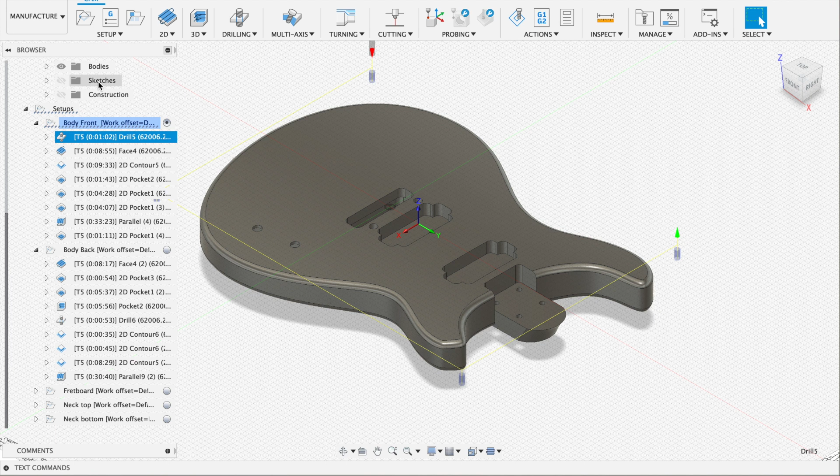Starting out with the drill strategy here. It drills 4 holes for the dowels, and I've created the points in the sketch here. So I've drawn a square and I've selected 4 points which are equally distant to each other. And that's just a simple drill strategy.

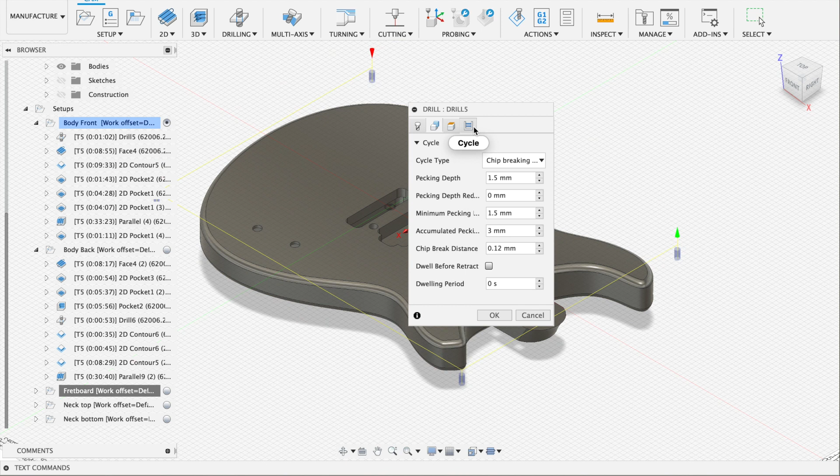4 faces. It has a 6mm flat bit. It has a plunge rate of 300. That's fast enough. And it goes down 12mm. My dowel holes, or my dowels, are 24. And it's on a chip breaking strategy. So it's a partial retract. It goes down a few millimeters, then goes up again, and then goes down a few more.

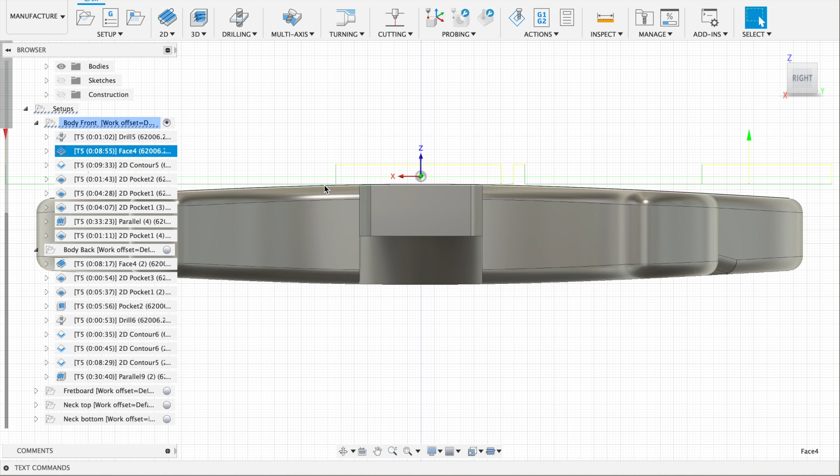Then we have the face strategy, and the face strategy just takes off a few millimeters of the stock material. If you look from the right side, it just takes off a few millimeters over here, and it stops just above the actual shape that I want. This is the process. It runs at 3000 millimeters per minute.

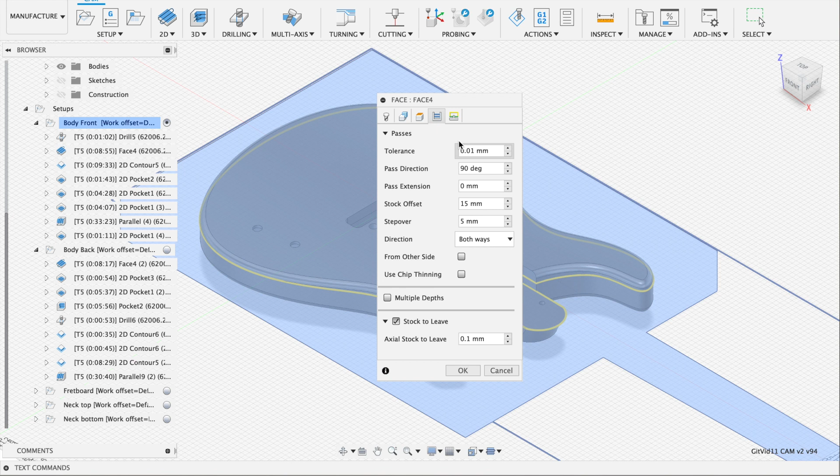I've selected this chain over here just to get the shape correct. Nothing special. There's a stock to leave on 0.1 millimeters. That's just for the later job, the parallel job that creates the final shape. And nothing fancy here as well.

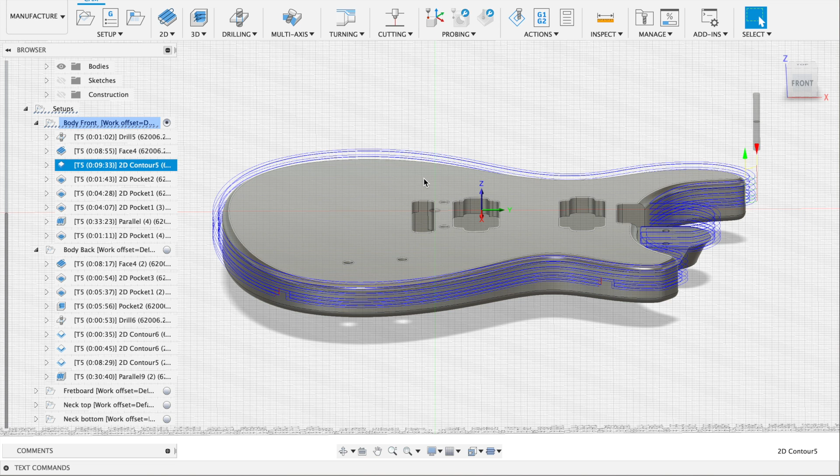So then we have the contour strategy, and this basically shapes the whole body from the side. I take off an extra layer, so then I can avoid those dreaded red lines while doing some other strategies. But also I'm creating these tabs over here, the holding tabs, just to secure the body in the stock material. I'll show you the strategy.

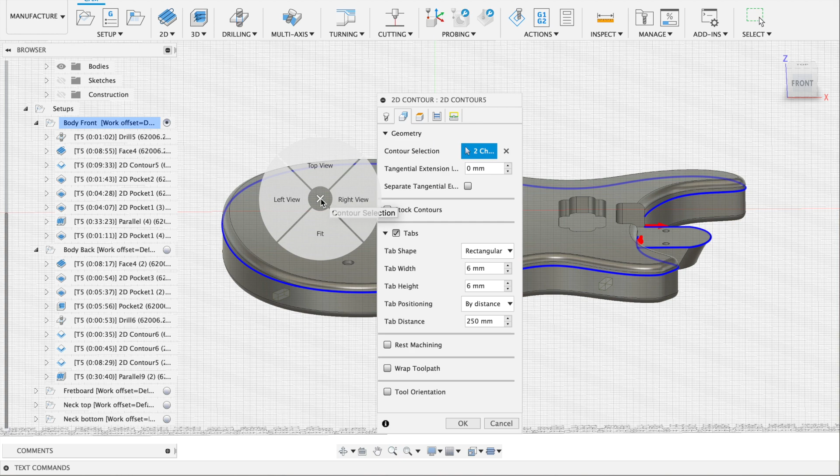It's at 3000 millimeters per minute. Again, same bit, 6 millimeters. The tabs are 6 millimeters wide and 6 millimeters high as well. And if you look from the top, then you can see there are really just 4 of them. 1, 2, 3, 4. I'm taking off 1 extra millimeter just to make sure that I'm completely through when I flip the board. And there's a roughing pass as well.

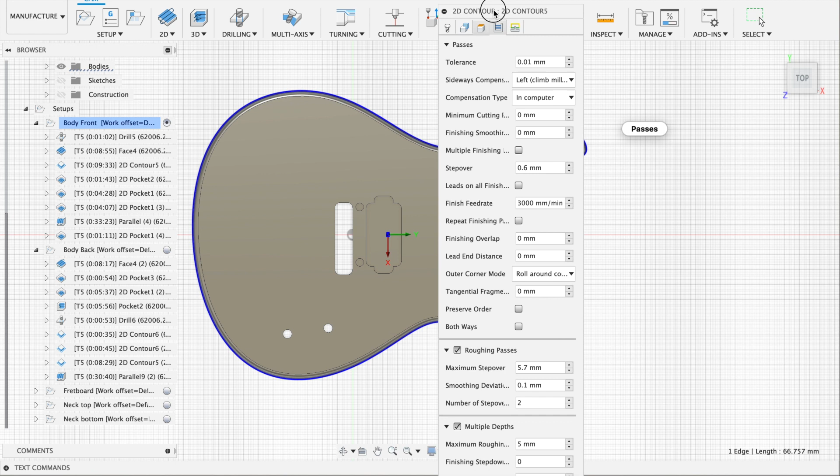Let me see. It has a maximum step over of 5.7. I'm taking off 5 millimeters per pass. That can be done easily. And basically that's it. Then we have a few pocket strategies, and this will make the holes for the tremolo, as well for the pickups, as well for the neck joint.

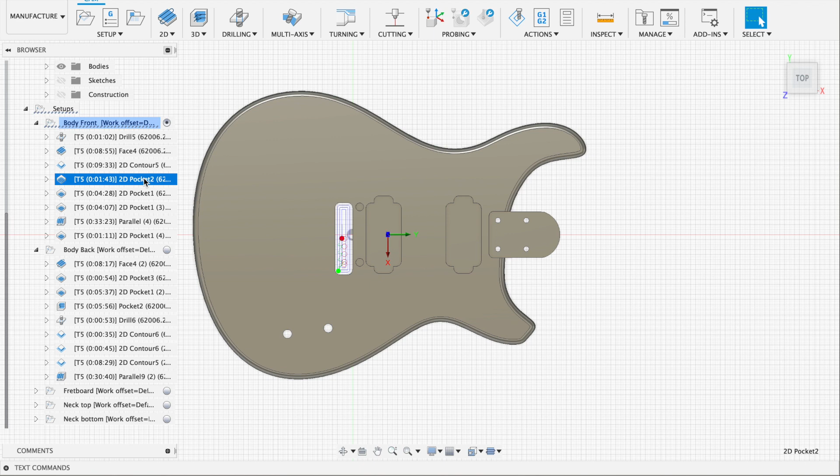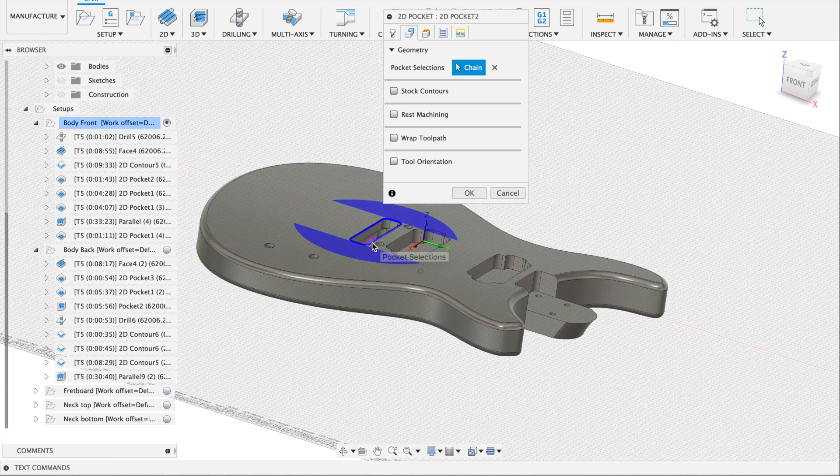The pocket for the tremolo is kind of special, because if you have a good look, it's not completely down. It's just running up until half of it, so up until this line. I'll show you the strategy. It's running at 3000 millimeters again. Nothing special here. You can see which line I've selected. That's the one over here, the top side. And the bottom height is at a certain edge, which is over here. That's this line over here.

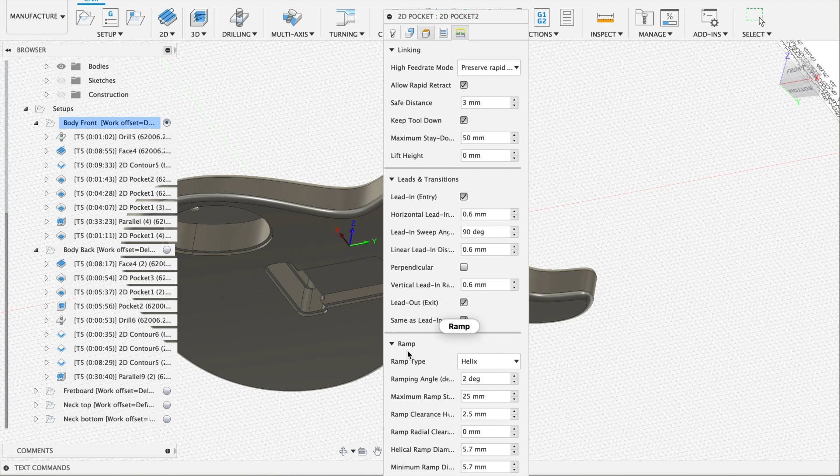I'm doing this at multiple depths of 5 millimeters again. And well, I'm using a ramp strategy. It's a type helix, so it'll turn in small rounds. And let me see if I can show you. If I select this, you can see these red circles here, and those are the helix strategies.

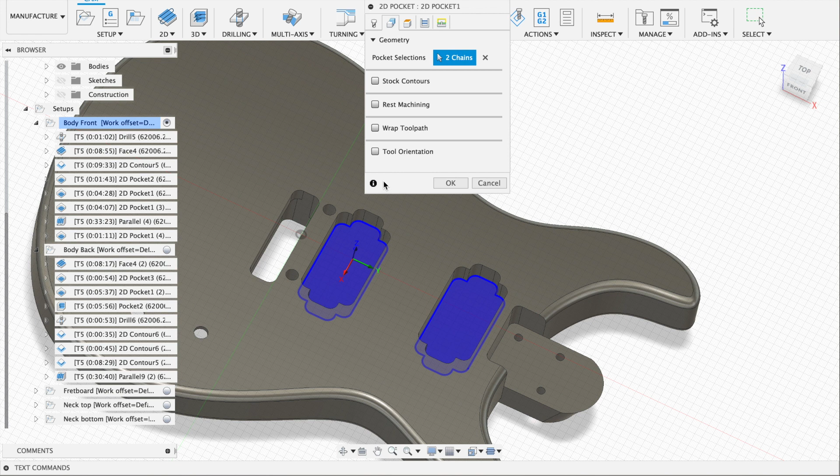So for the pickups, it's basically the same thing. There are 2 chains. I've selected the bottom chains here, and selected contours are on the bottom. I'm using multiple depths of 5 millimeters. Really, again, the ramp has a helix type, and basically that's it.

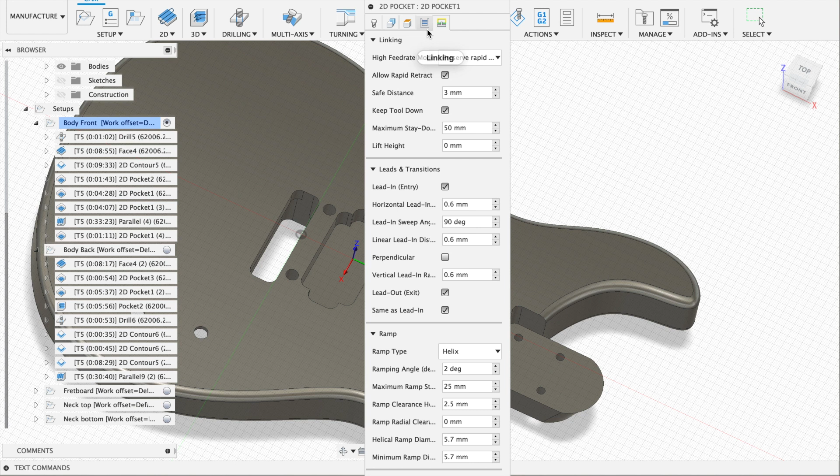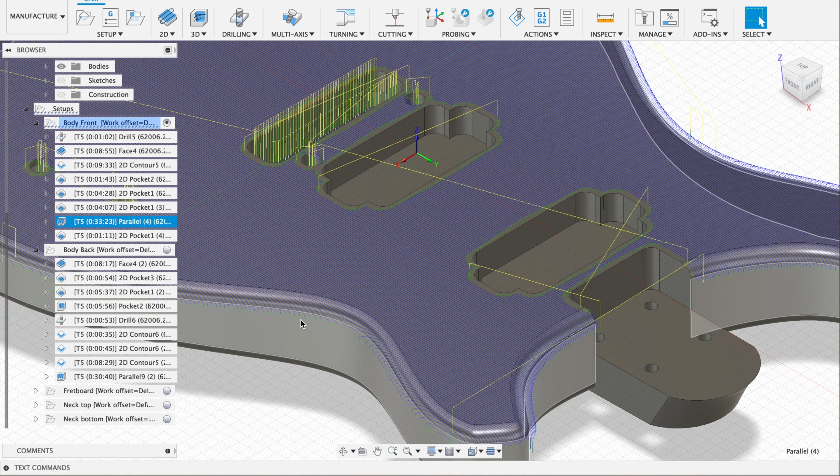And then we get to the interesting part, the parallel job. And as you can see, it's running horizontally, but also a bit on the side over here. So as you can see, these lines are curved over here. Running at 3000. I could do this at 5. I could do this at 6 even. But you know, you learn every day. So I'm doing this at 3, and maybe later on I'll be doing this at 6.

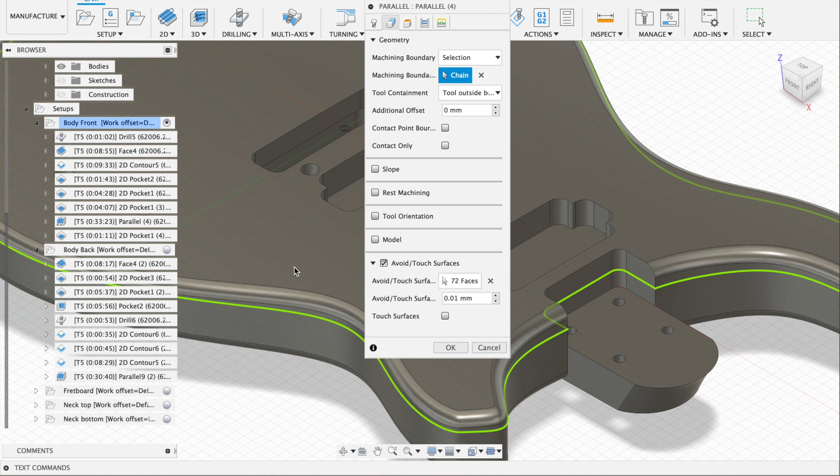Avoid and touch surfaces. There are 72 faces that I'd like to avoid. So just to make sure that these holes aren't worked at, and this here I also don't want to be touched. So there's a bottom height which is selected at this point. Let me see, kind of halfway. So that'll save me some time as well.

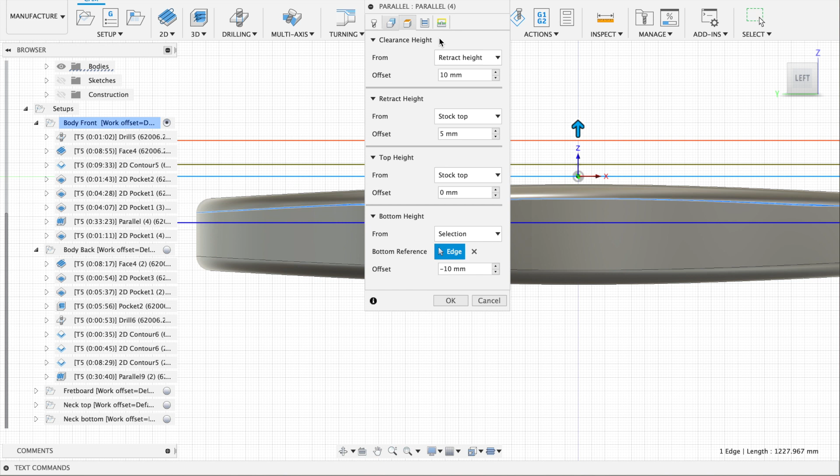Nothing special here. There's a step over of 1 millimeter. That could easily be 0.5 millimeters or 0.3 for a smoother end result. Maybe I'll do that later. And I'm doing this both ways as well. I learned that if I'm doing a parallel process and using a step over of 1 millimeter, it's not really a fine result, but you can always sand it down. So it's good for me at this point.

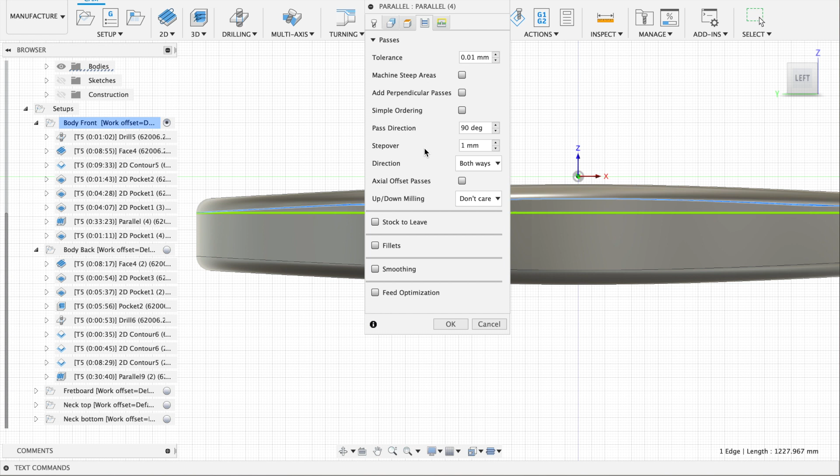Here's nothing special to see. And for the last strategy, we have a pocket, and I'll show you what that does. It makes the hole for the controls as well as for the tremolo pins.

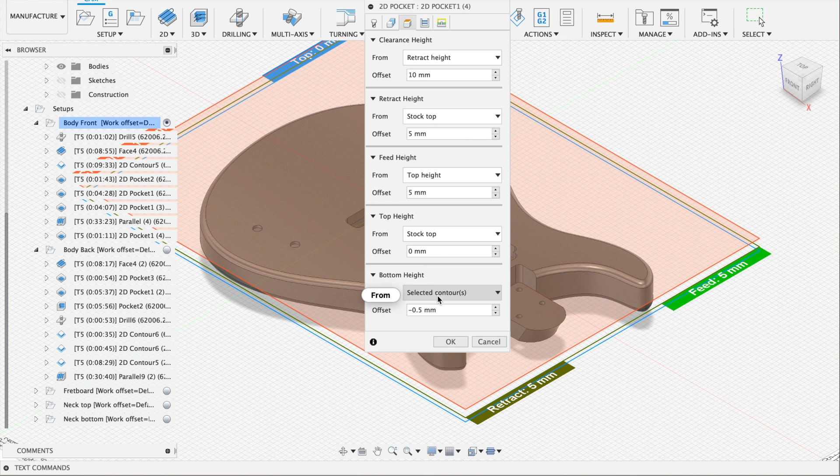And I'll show you the strategy as well. 3000 millimeters per minute, for chains, selected contours. I'll make them just slightly deeper just to make sure that I'm completely through. And using multiple depths again of 5 millimeters. Nothing special. Helix again, you know, it's just same old. And this works perfectly for the top side.

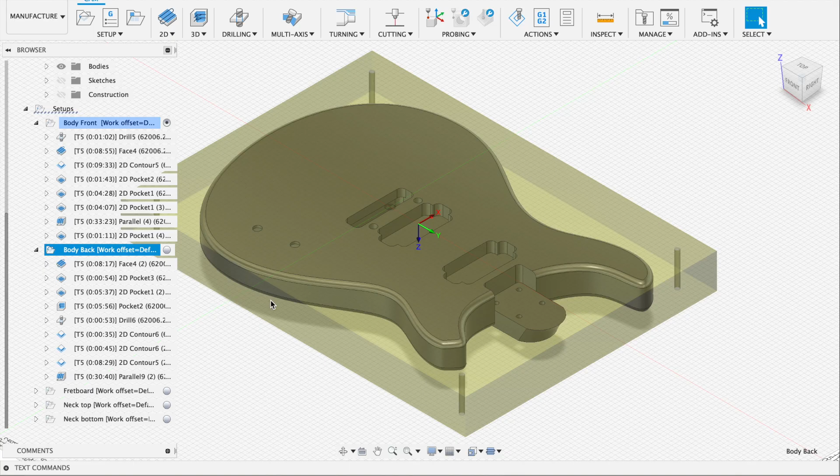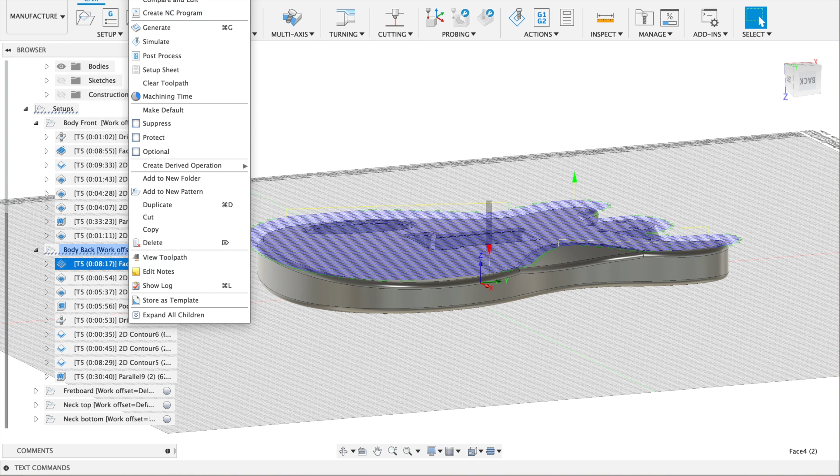So for the bottom side, we need to flip the board. There you go. And we have a few strategies as well. Basically, they are the same as for the top side. So we need a facing process as well. As you can see, this facing process again takes up a few millimeters. I'll show you the complete strategy. 3000 millimeters per minute again.

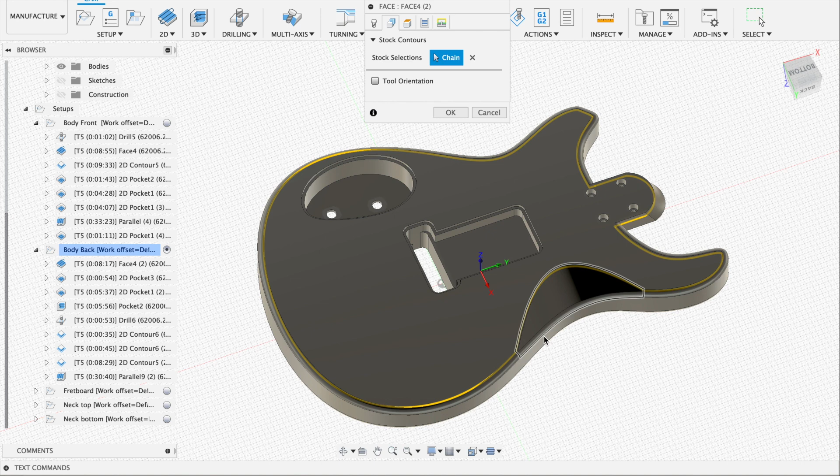Stock selection is this outside curve. I don't care that this line is not over here. So later on, when you're doing the parallel process, it'll take off just a millimeter vertically, and so there's no trouble that this bit will be higher after the facing process. So nothing has changed here. Stock leave again 0.1 millimeters just to prepare for the parallel process later on. Nothing special here.

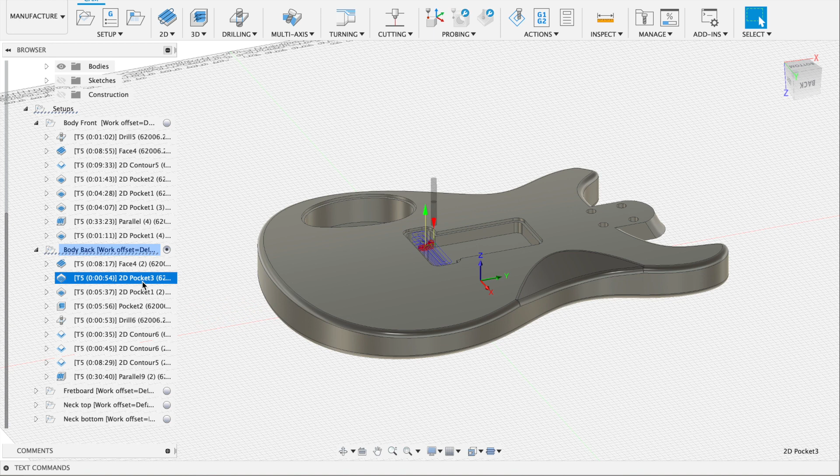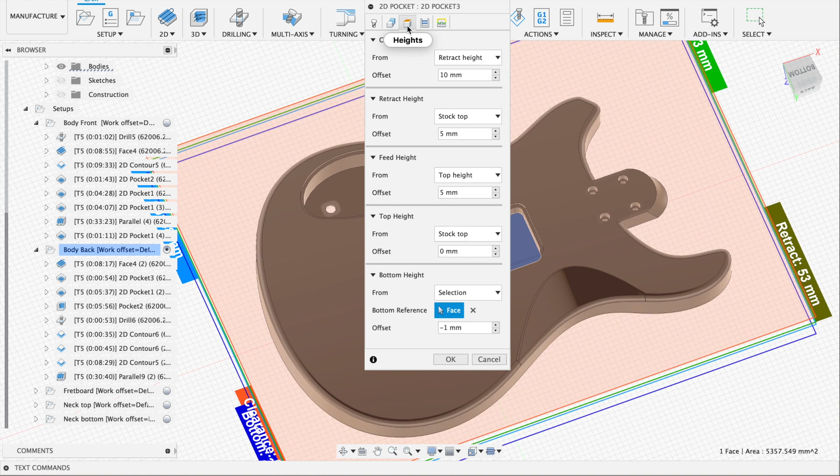Then we have a few pocket selections again, creating the holes for the tremolo. I'll show you the process. Again, 3000, 6 millimeter bit. I selected this chain just to create the same hole as on the other side. I did select a bottom height, which is over here. This is the bottom really of the spring section of the tremolo. I'm using multiple depths of 5 millimeters, and basically that's it. Again, ramp type is a helix.

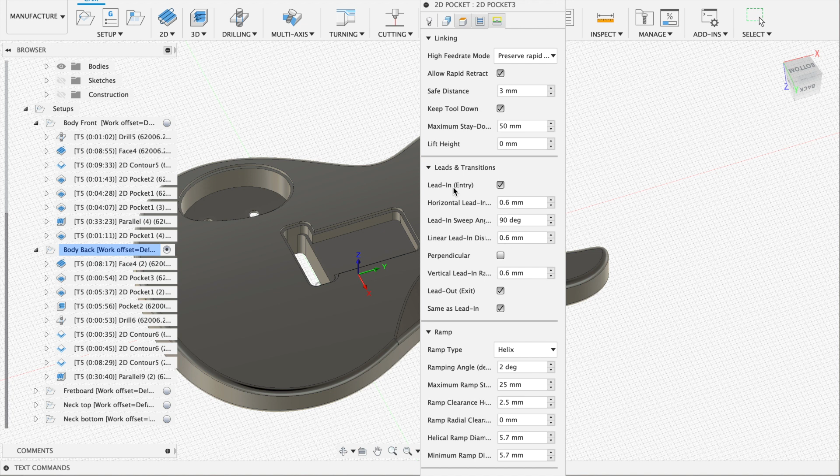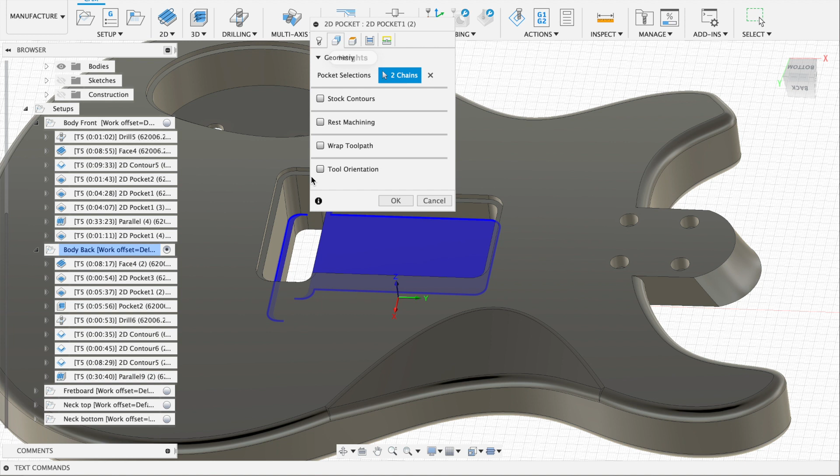Nothing special here. Then we have a pocket strategy for the spring section of the tremolo. This takes off some more material of the spring section. I'll show you the strategies. 3000 millimeters per minute, 2 chains. So the lower chain and the upper chain. Nothing special. Multiple depths 5 millimeters. Well, again, ramp type helix.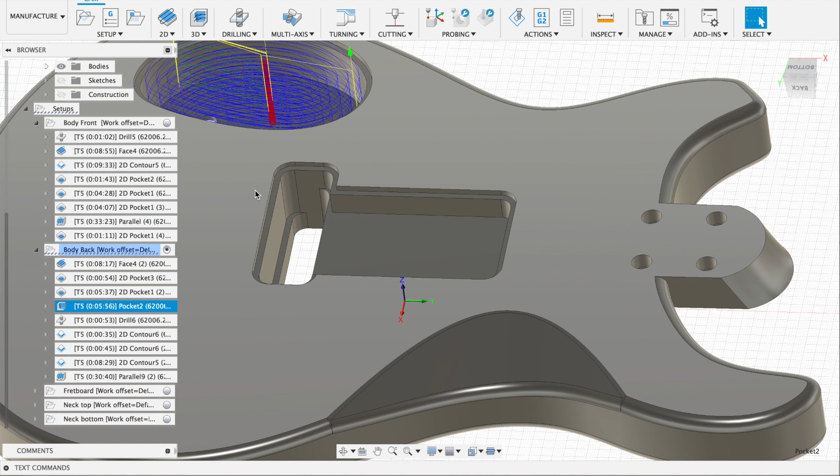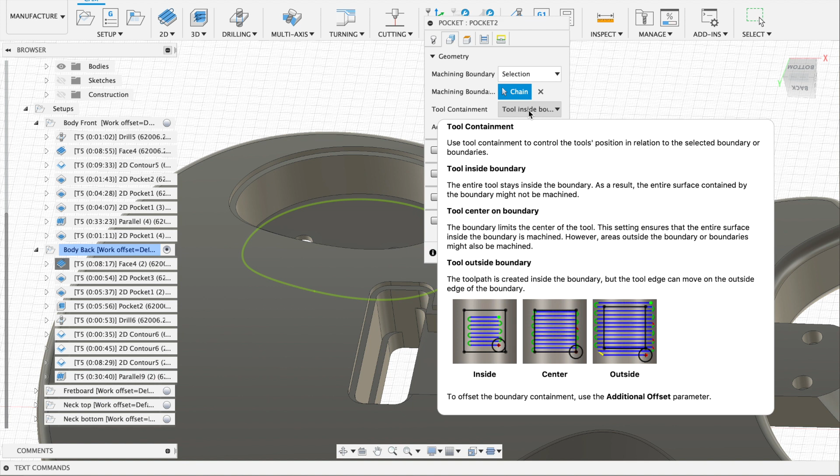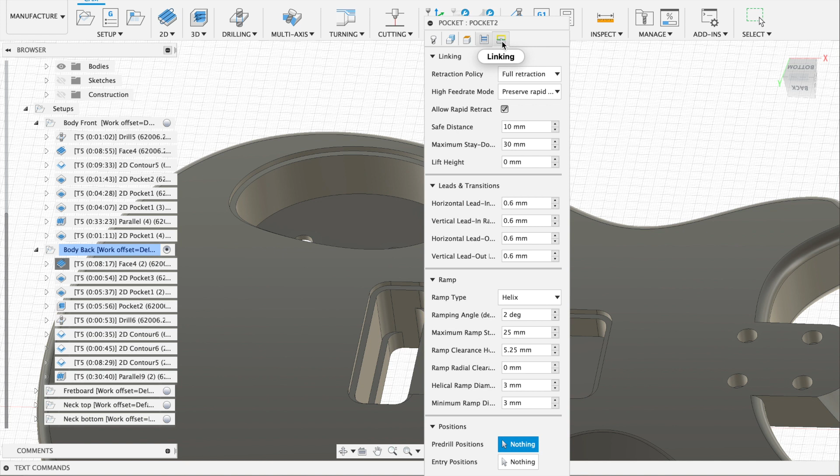Then we get to the pocket section of the controls. And this is one of the larger areas that I take out. There's a chain over here, tool inside of boundary, so it'll only touch the area that's within the pocket, not on the edges of the pocket. I'm using a bottom height, which is this face. Well, nothing special here as well. Maximum roughing step I set to 5 millimeters, and well, again, helix type, nothing special here.

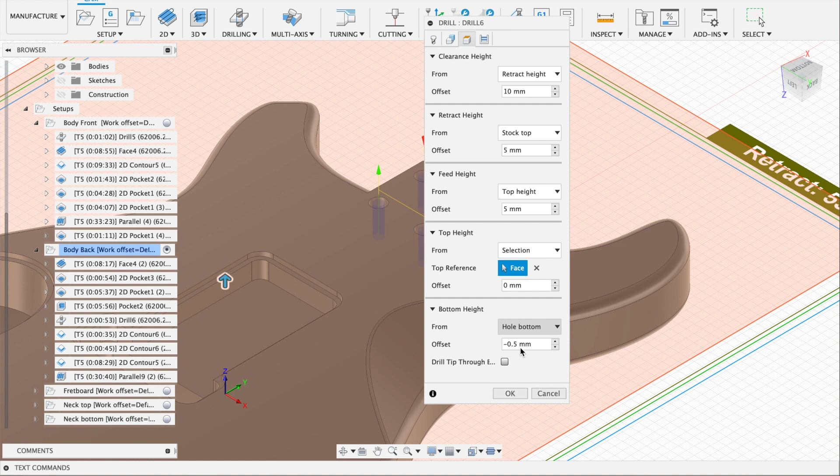Then we have the drill section for the neck joints. I'm making here a few holes for the screws to hold on to the neck. I'll show you the strategy first. 4 faces, hole bottom. I took off some extra material just to make sure I'm completely through, and I'm using a chip breaking strategy again, just so the drill bit goes down, up, and again down, just to make it easier for the bit to drill some holes.

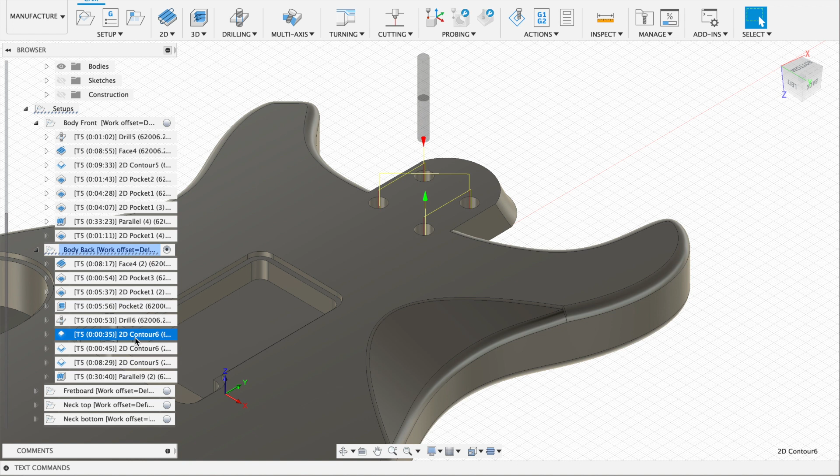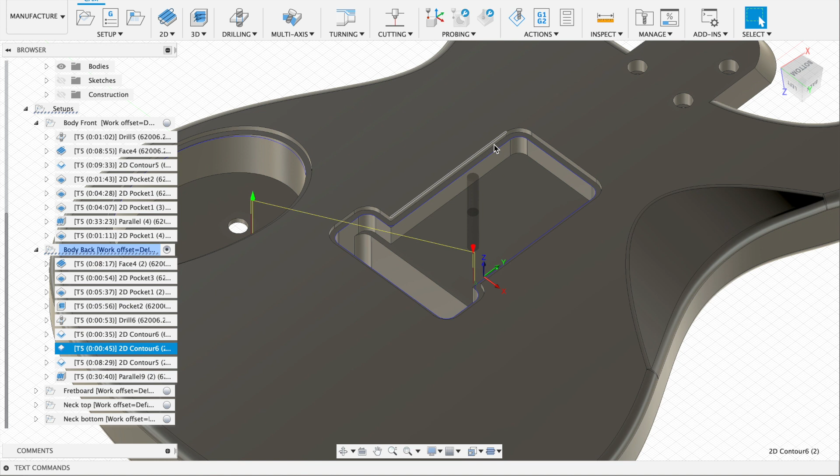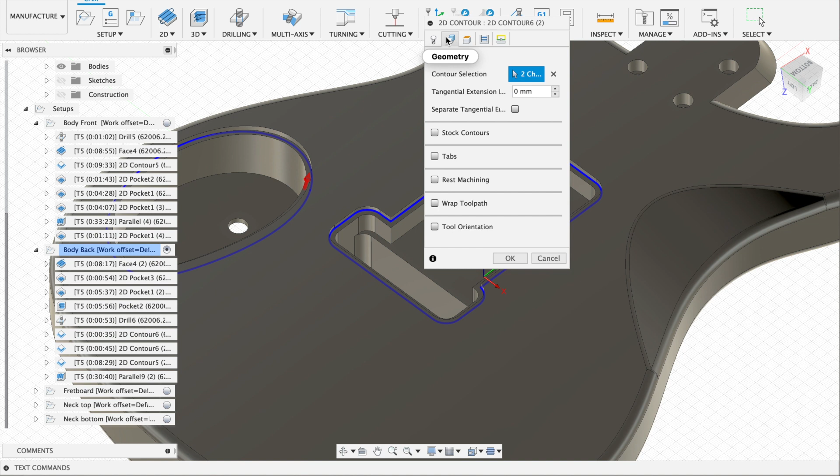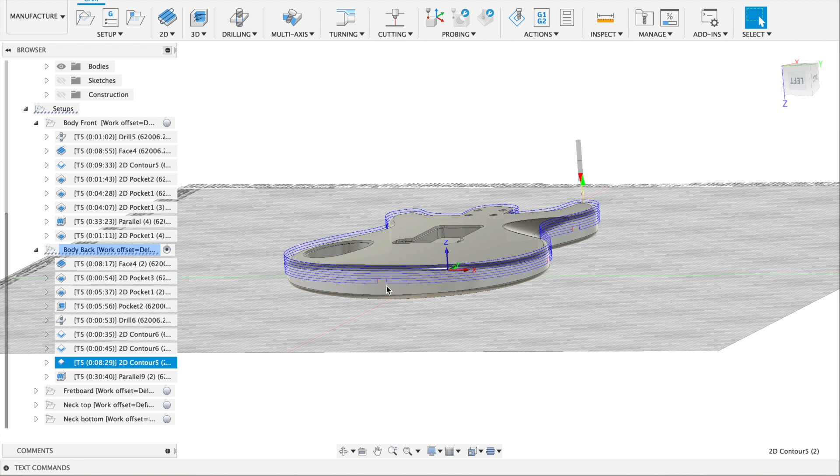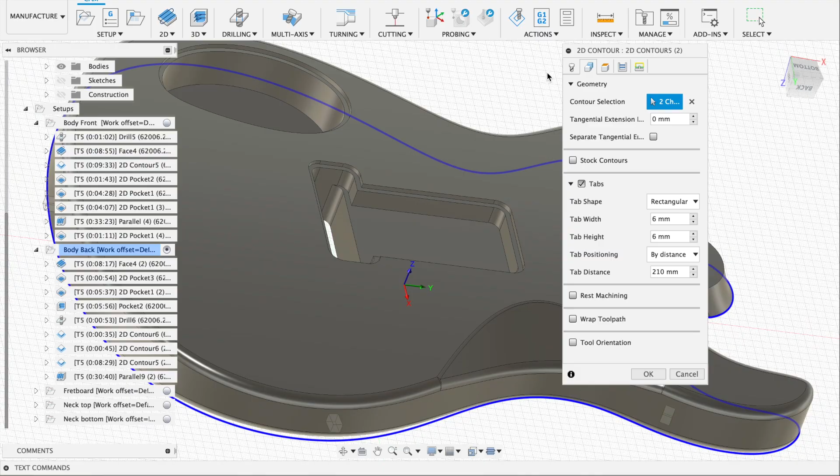Then all that is left to do is the contour process, which is basically the same as on the other side. I'm creating these tabs as well over here, just to make sure that this side is being held as well. I'll show you the strategy. 3000 millimeters per minute. I'm creating tabs. I'm creating a few more tabs. I believe I make 5, but I'm not sure. I believe it was 5. 1, 2, 3, 4, 5.

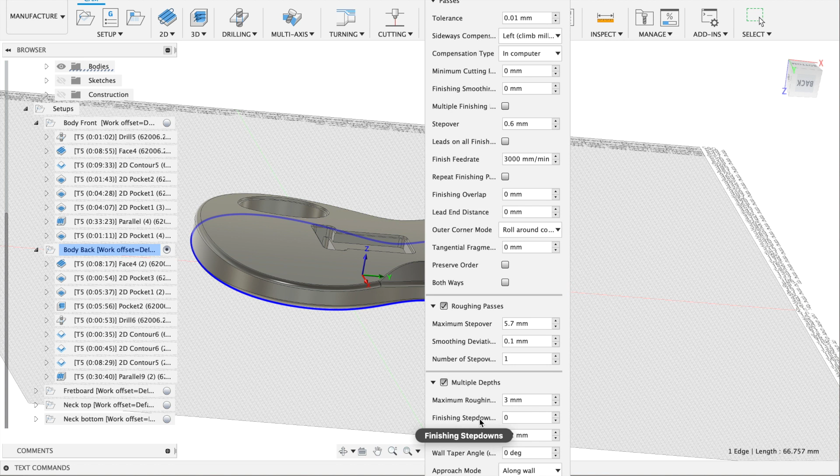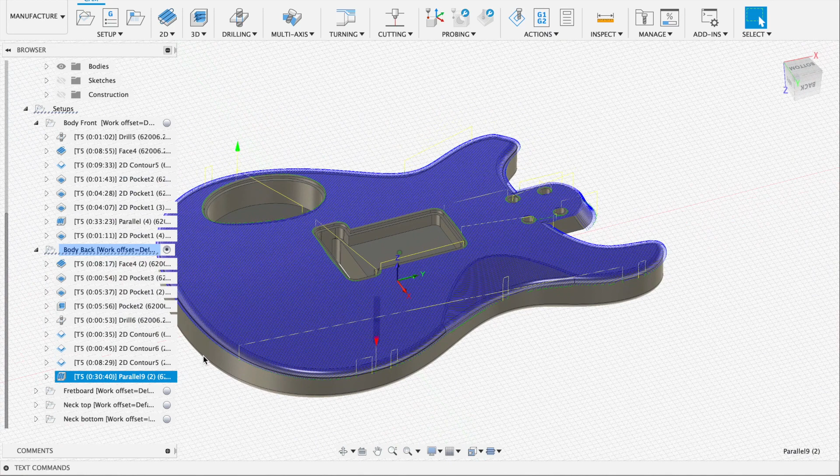And the selection edge again is just 1 millimeter down, just to make sure I'm completely through. There's a roughing pass over here, 5.7, well, it's basically the same, in multiple steps of 3 millimeters. I'm not sure why I did that. So basically that's it. The parallel process, which is a process that makes the final shape. As you can see, it also touches this comfort zone of the guitar body.

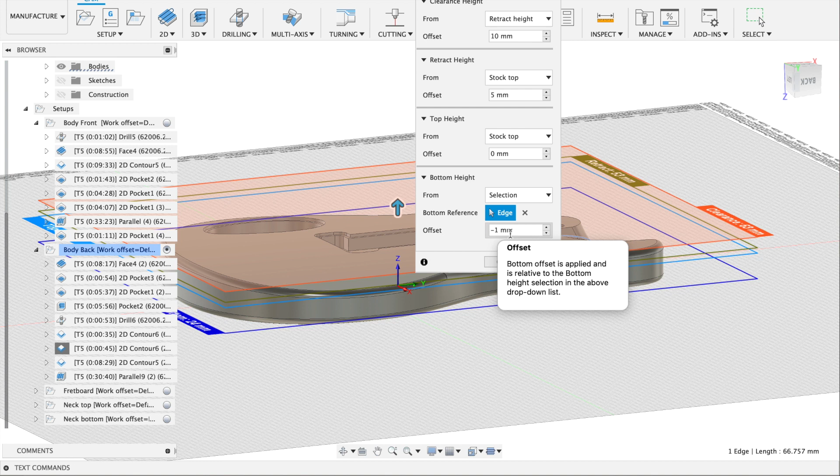3000 millimeters per minute, could be higher, as I told you before. Avoiding a few surfaces that I don't want to touch. The bottom edge is just 1 millimeter down, just to make sure that everything is being touched. It has a pass direction of 90. If you change this number to 180 or 270, you'll change the direction of the lines. Step over again is 1 millimeter.

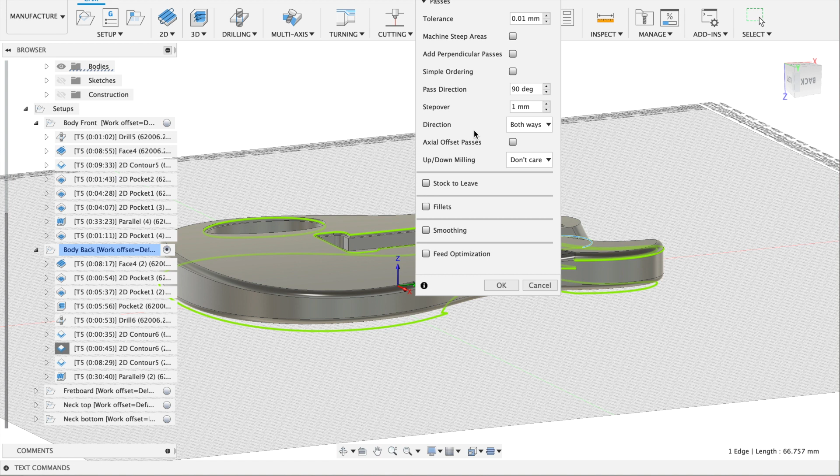I'm doing it both ways. In future, maybe I'll be doing this just one way, just to get a smoother result. But I'll see about that later. So basically that's it. I'll show you the simulation.

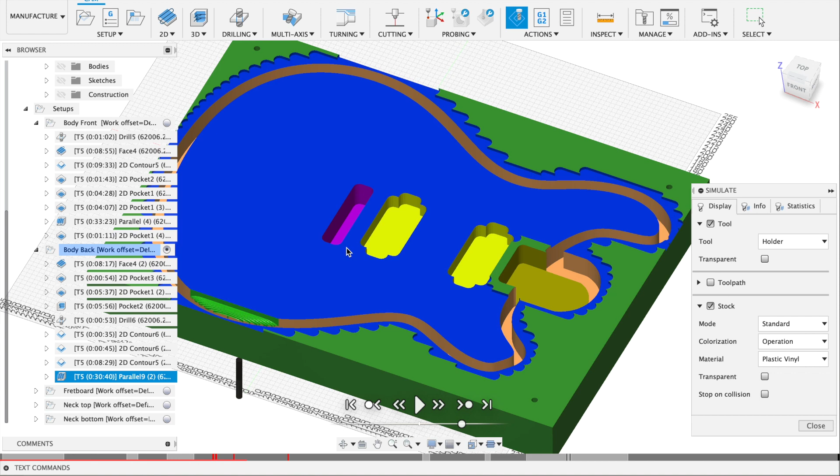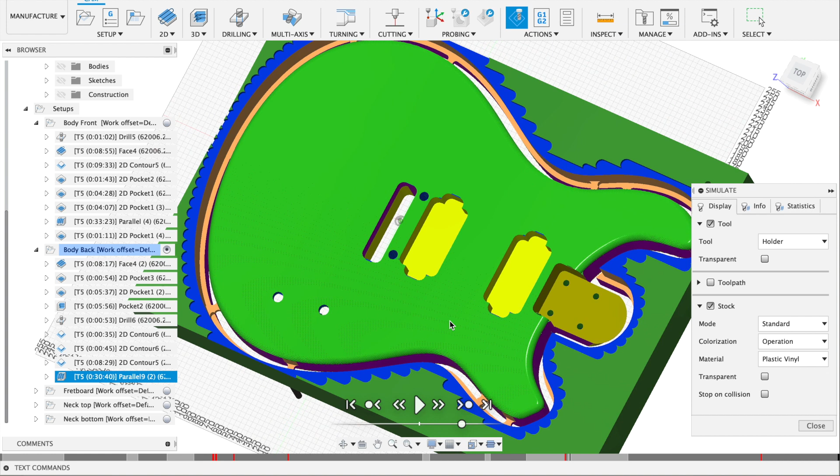And it'll come out like this. It's so busy calculating the other side as well. This would be the results. So I'll show you the actual machine now, and I have some comments about that as well.

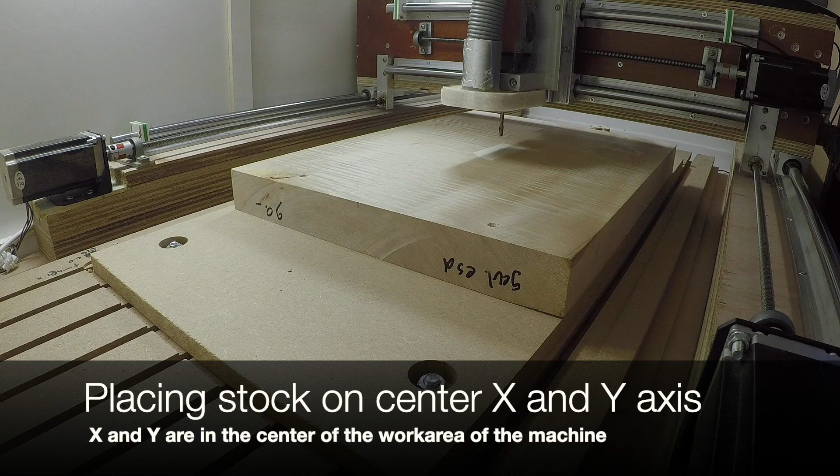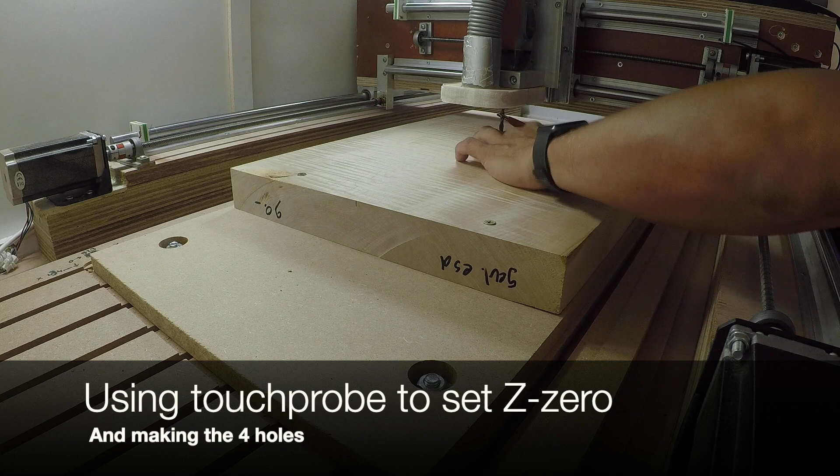So the job starts with creating the dowel holes in my scrap board. I'm placing the material directly in the center of my machine. I'm securing it with screws. I'm creating the 0 position for Z with my touch probe, and then I'll make the 4 dowel holes in the bottom side of my top material. So I'm using the dowel holes to create a firm position for my stock material.

So here I flip the board, again setting 0 on top of the material, and then I can start my first job. Again, creating holes because I'm going to flip the board later on. Now you can see the face strategy, and I'm taking off too little material. You can see the lines on the wood that'll stick, and I want that to come off in this strategy. So on the bottom side I've changed the stepover to 5mm instead of 5.7, and that creates a nice smooth finish which I do not have here.

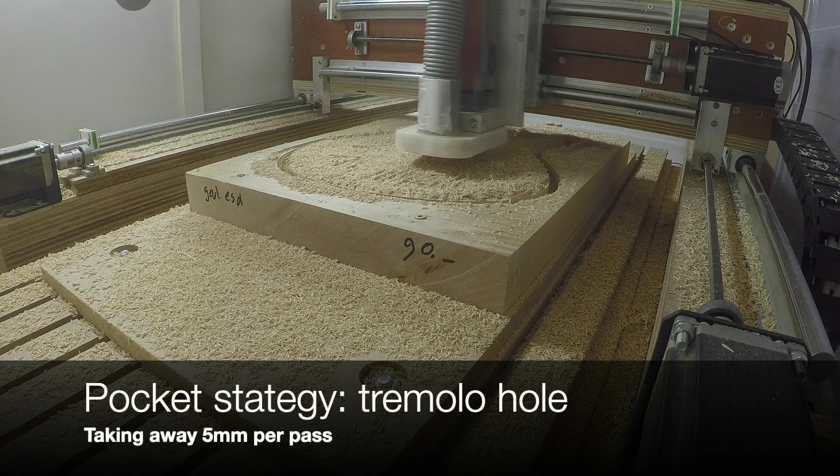Along the way I'm cleaning the machine as well with my vacuum cleaner, just to keep things a bit more visible, and also I can then see how the machine is doing. This is the contour process, and this is the tremolo process, creating the holes for the tremolo, for the 2 pickup holes, 5mm per pass. And now it's doing the neck joint. Again, 5mm per pass is easily doable.

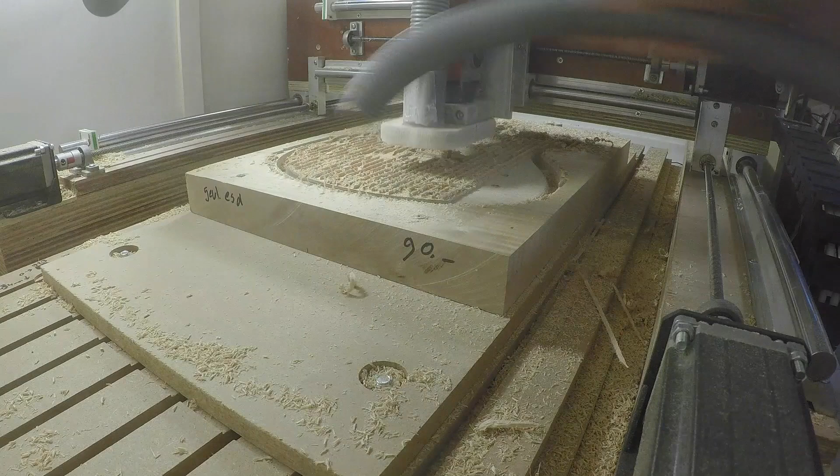This is the nicest process, I think. This is the parallel process. It has a stepover of 1mm, and maybe later on I'll be doing this with a round bit, because then you get much nicer and cleaner results. I'm doing this with a flat bit. I learn every day, so if I'll be doing this with a round bit, I expect a much nicer result. Although this is pretty clean as well. I have to do a bit more sanding though, that I wouldn't be doing with a round bit, I guess.

So this whole process of machining takes up an hour, including this parallel process. This parallel process is by far the longest. This takes up about 35 minutes, just because of the smaller steps. It could take longer if I take even smaller steps, let's say 0.5mm. But you know, I just wanted to do it within an hour. So it's nearly finished now. And this doesn't make such a mess because it's just smaller steps and no big steps.

There it goes, creating the holes for the controls and for the tremolo. So it's done. So now I can clean up the machine, take out all the dirt, and unscrew my stock material, flipping the board, just sanding it down a bit, placing the dowels, securing it again with screws. And now the Z0 is on the bottom of the material, so the scrap board now is the Z0. X and Y still are machine center.

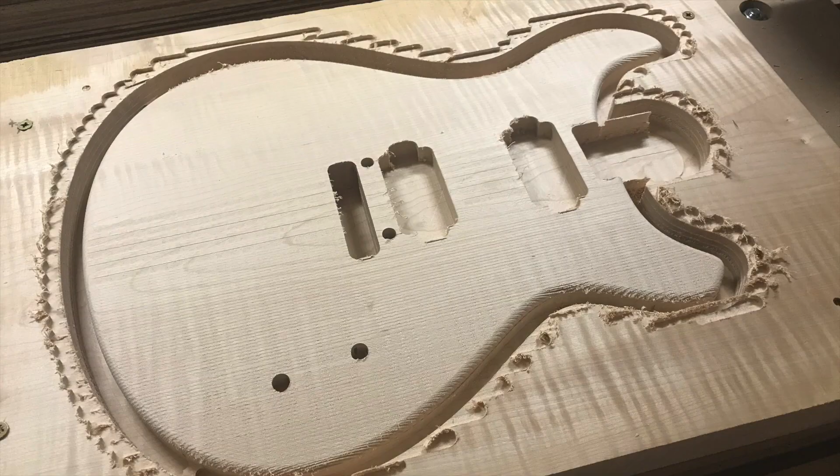So now it's completely done. Cleaning the machine again. And then I'm going to unscrew the stock material. And these are the pictures that I took right after the process. You can see the lines of the parallel process. That's something you just have to sand down. Here I took it out of the stock material, gave it a good sanding, and I think the end result is pretty good.